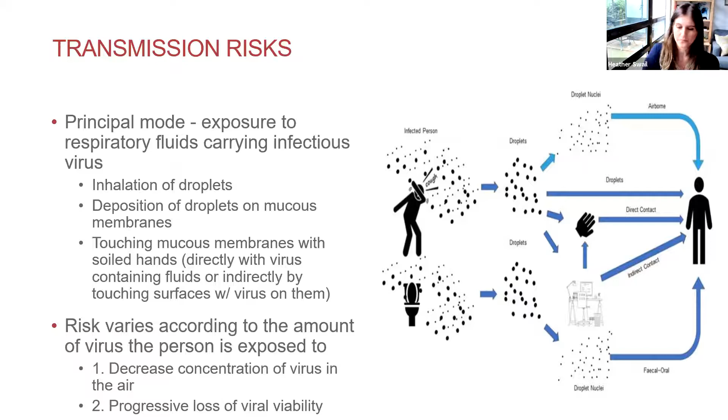So one of the things we're going to touch on is the requirements in BC. If you're not from BC, do not worry, the solutions we're going to talk about really apply everywhere, but I'm just going to touch on some of the WorkSafe BC specific legislation that they are requiring. The first one is that all employers require a COVID-19 safety plan. I hope all of your workplaces have this in place already. If they do not, the WorkSafe BC website has so many good free resources on how to develop this yourself.

One of the things that has been talked about over COVID is a lot of buzzwords: unprecedented times, uncharted territory, evolving science, and they're right. This is a global pandemic. We have not lived through something this severe in a very long time, and the science has been changing throughout COVID.

When COVID first started, I was in the office, it was very low occupancy, but we weren't required to wear masks. Now we have to wear masks in our office in addition to the physical distancing. So things have really changed over the course of a year. And because of that, WorkSafe BC makes sure that you are monitoring your plan and updating it with these changes as well. So the main component of a safety plan is to assess the risks.

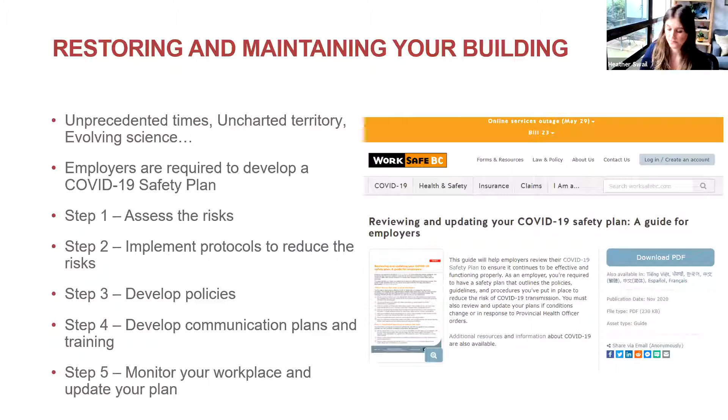So now we'll get into just a touch point on underoccupied versus unoccupied. I think a lot of buildings at the beginning of the pandemic were totally empty. And as we've progressed through this, we've kind of moved to more of a low occupancy, I would say. I have a couple poll questions. Rui, if you wouldn't mind just bringing up the first one. I'd love to just take the temperature of the audience and see what your workplaces are currently at right now.

Okay, so the first question we're going to be asking is, what is the current occupancy of your building? Is it unoccupied, no one's in it? Is it underoccupied, where maybe there's just a lot less people in the office, low occupancy? Or have you resumed to the design capacity? Is everyone back, but maybe it's under a different protocol like spread out or something? Or is it unknown? Maybe you haven't been back to the office in a year and you have no idea how it's functioning. If you can please vote, I'd love to know what you guys are all working in right now.

So it looks like 90% of you are in under-occupied buildings, and the last 10% are at designed capacity. I think that's really encouraging that people are moving back to their normal work life, but I'm also encouraged that it's sort of a cautious return as well.

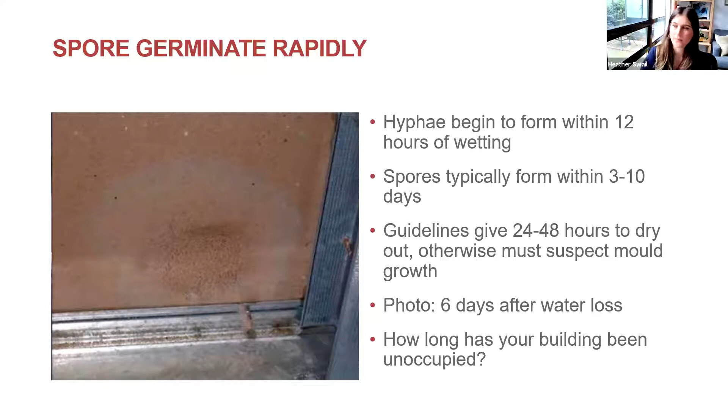So we'll just chat about some common sources of mold. The first two, roof leaks and plumbing leaks, these are extremely common. This happens whenever there's a failure with the roofing or the plumbing system. And the thing to take away here is that large issues are extremely obvious. If you are dripping water from the ceiling, there's an issue. But if it's a slow leak that's going on behind a wall cavity or a ceiling cavity, you might not know there's a big issue and it could be hidden.

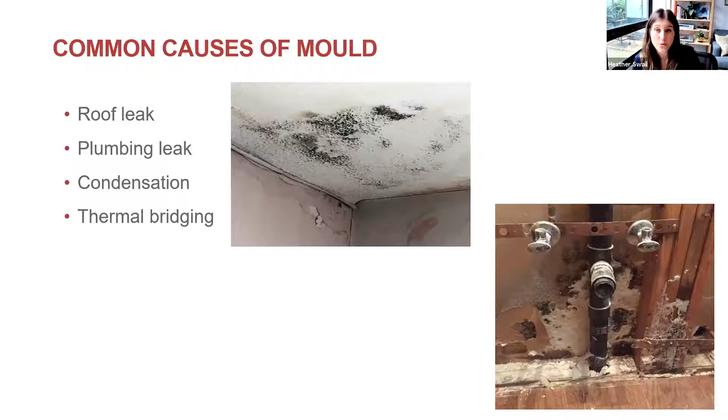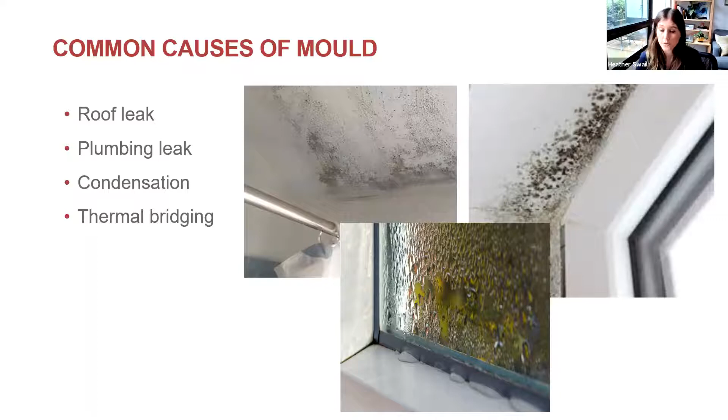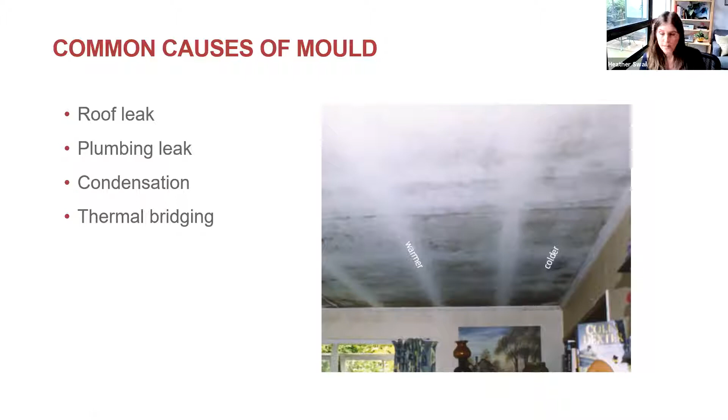And the thing is that even though you can't see it, if hidden spores are being amplified, they can still negatively impact the air quality. And mold is a health hazard. It does affect everyone differently. Very minor reactions can be something on a minor allergic spectrum, like irritation of the throat, sneezing, but things can escalate as well. It can cause multi-system inflammatory effects, neurological problems, or even death if it was in certain species

of very high levels. In 2003, there were 10,000 mold-related lawsuits in the United States, and some of them have some celebrities, and I will tell you about them because I'm addicted to the tabloids. So in that year, in 2003, Ed McMahon, the host of The Tonight Show, settled a lawsuit for $7.2 million because his house made him and his wife very ill because of toxic mold, and it killed their dog.

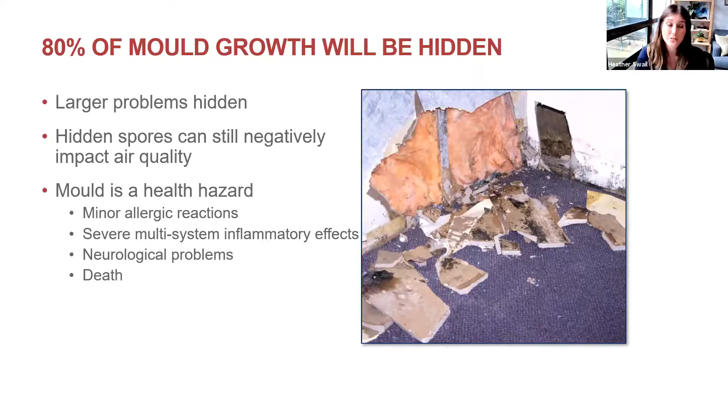So steps to minimize mold after a prolonged shutdown or a prolonged period of reduced occupancy. The first thing to talk about is managing your relative humidity. Mold can grow on almost anything. It just needs a nutrient source, it needs moisture, and it needs the proper conditions. So keeping your relative humidity between 40 to 60% is ideal during COVID, also from an air quality perspective, which we'll talk about a little bit more later.

The next thing is doing your due diligence, inspecting your building for any moisture or water damage. Smell musty odors as well. If you are smelling something that is, I like to call it kind of like a musty, possibly grandma smell. It definitely smells like my grandma's basement because that is very moldy. That's exactly what I think of.

And if you do find any issues, address the source of the water first and then follow it with your remedial mold actions. And then also HVAC operation. Make sure you have a maintenance program and you're inspecting it regularly. We'll talk about that more in the upcoming slides as well.

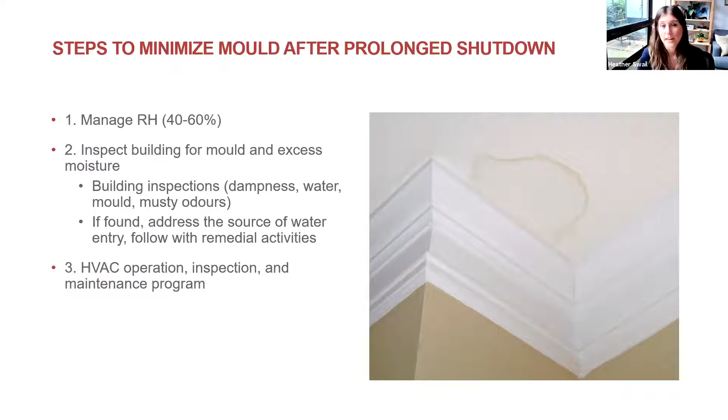Okay, we're going to move on to Legionella now, which is the second environmental hazard identified by the CDC for returning to buildings. Legionellosis are the diseases caused by Legionella bacteria, and there's two main ones. The first one is Legionnaires' disease, and the second is Pontiac fever. Legionnaires' disease is the more serious of the diseases. It causes potentially deadly lung infections. Pontiac fever is the more mild infection with more flu-like symptoms.

The way to get these diseases is inhaling the Legionella bacteria. So basically the bacteria is aerosolized, and if you inhale it, that's how you can get Legionnaires' disease or Pontiac fever. And the main reason people get sick is because the water system is not properly maintained in the building. We'll talk about those in the next couple of slides as well. One way this is not like COVID is it's not contagious. COVID, we can pass from person to person. Legionnaires' disease sticks with the host.

You can't spread it. There's about 6,000 cases a year that the US is reporting, but we do think that number is probably on the low side because some people that have the symptoms of Pontiac fever probably think it's just a flu and it goes away on its own without treatment. But it is very treatable; if it's caught early with just standard antibiotics, most cases do clear up. However, the fatality rate is about 10 to 15%.

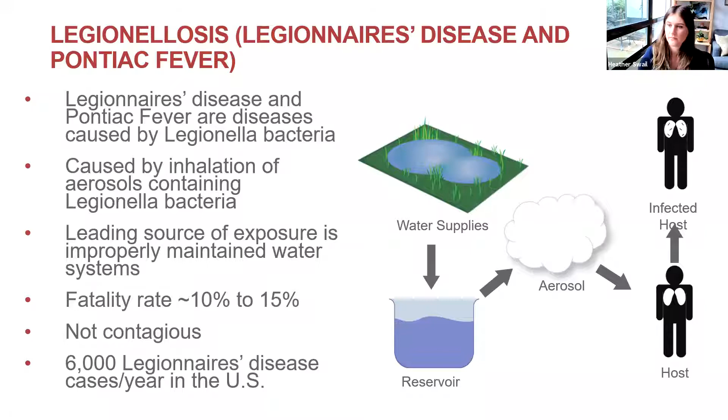So what affects Legionella? There are two really big things to chat about, and one is temperature. Temperature is a huge one. Legionella bacteria is in all water. It's in all natural streams and lakes. It's when it's in a man-made system where that bacteria accumulates to really high levels that it's the problem. A temperature in the Legionella growth range of 20 to 49 degrees Celsius is ideal growth for that bacteria. Anything above 49, the bacteria will start to die off, with rapid death above 70 degrees Celsius. So really the hotter the better for killing Legionella bacteria.

Another thing to talk about is biofilm. Biofilm is that sticky, slimy, pond scum-like stuff. It's the primary contributor to Legionella outbreaks. Basically, this slime protects the bacteria, so whenever it's disturbed, it releases a huge quantity of Legionella bacteria, which is associated with a lot of the building outbreaks that we see. Particularly, we see this issue on corroded surfaces, so your domestic hot and cold water systems.

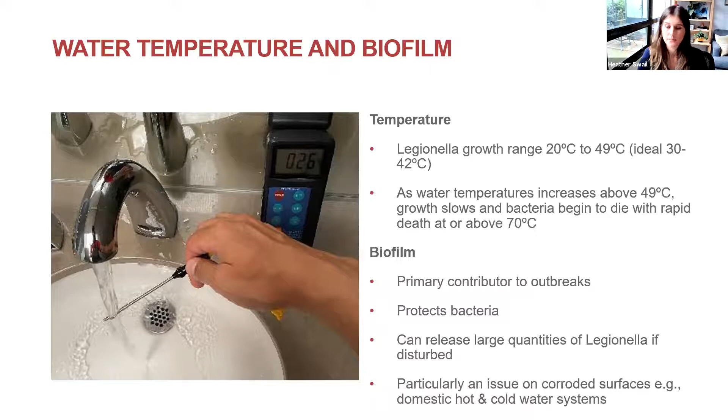So the main concern specifically with COVID is dead legs. So dead legs are the section between, in this case, the sink and the circulation riser where the water is sitting stagnant. So that horizontal piece there. It's a big issue in COVID because we're not using these sinks like we used to be, in this case, a sink. If we had a fully occupied building, maybe a sink is used 200 times a day, depending on how big your office is.

But if the occupancy is not there or has been reduced, that water is sitting stagnant in that dead leg. And it's a beautiful breeding ground for Legionella bacteria. So turning on that, if the building has not flushed water regularly, this is a big concern.

The second concern with this from the CDC is leaching of metals as well. So while the dead legs foster bacteria growth, that water also sits in the pipe that can leach chemicals and metals that it's sitting in. So if you have an older building with lead solder, that lead could leach into the water as well. So another thing to think about, and also why flushing the water in your building is super important.

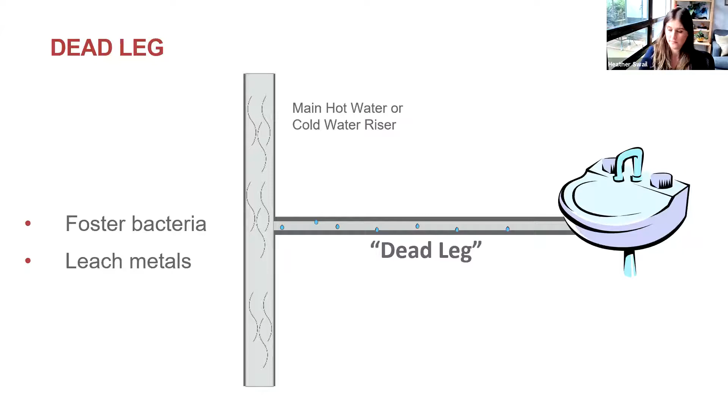So the recent questions we're getting with Legionella is, do you have it in your building? My building has been vacant or very low occupancy for so long. What do I do now that people are coming back? Do I have to flush the building? Do I have to test it? What are my resources associated with this?

The simple answer is that essentially almost all buildings will have Legionella. If your building has been vacant or low occupancy and there has been regular flushing, you're probably going to be in okay shape. If the flushing has not happened regularly, our recommendation would be to start flushing the building and then test your building for Legionella to make sure that you're managing the problem. We don't recommend testing if you haven't flushed yet. There's really no need to test a worst case scenario. We want to test after the building's been flushed to make sure the program you're using is working for your building. And we will talk about testing coming up.

The good thing about Legionella is that it is such a well-documented problem. There are tons of resources of how to manage this for free. There are ASHRAE standards, AIHA standards, the Government of Canada standards that will help you with flushing and how to maintain your water in the building.

So a couple of the things when you're considering testing before people come back. The first one is that there are specific sampling procedures. For one thing, the supplies need to be in specific sterile bottles of a certain size, depending on what you're sampling. It's a 100 milliliter sample for a cooling tower and a 500 milliliter sample for usually any other source. It has to be packed in an insulated cooler, and the timeline is also very important.

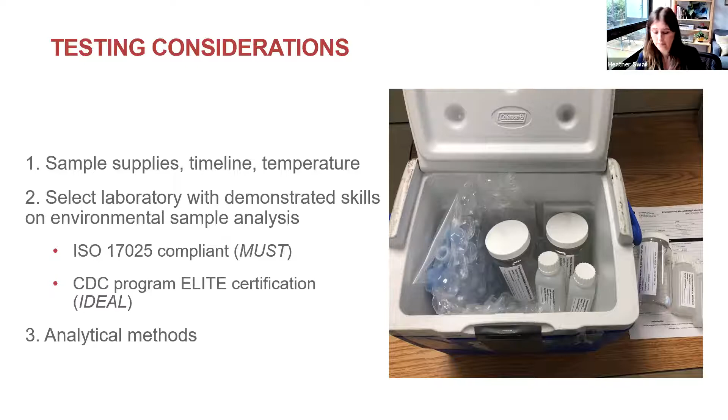So for the Legionella analytical methods, there's 3 main methods. There's culturing, qPCR, and then DIY test kits.

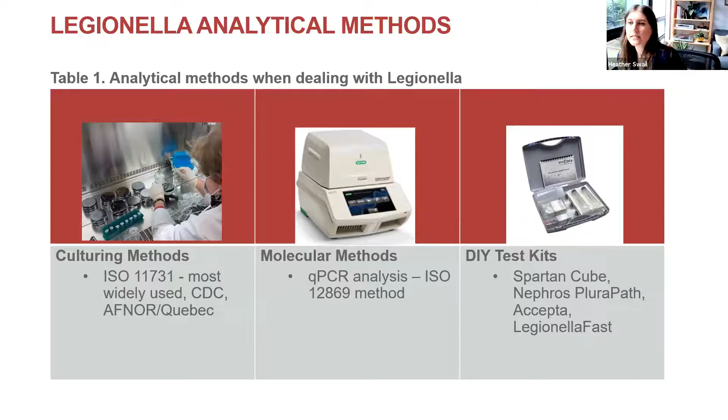Definitely culturing is the gold standard. What it does is it measures the viable colonies of Legionella. So you can see the Petri dish on the side. That's the Legionella growing, actually. The one downfall with this is that it does take 7 to 10 days to get the results because they are culturing on the Petri dish plates, but it will tell you the viable Legionella, which is so important.

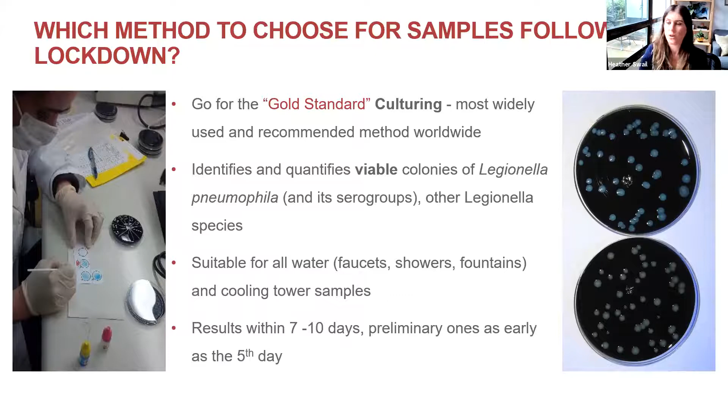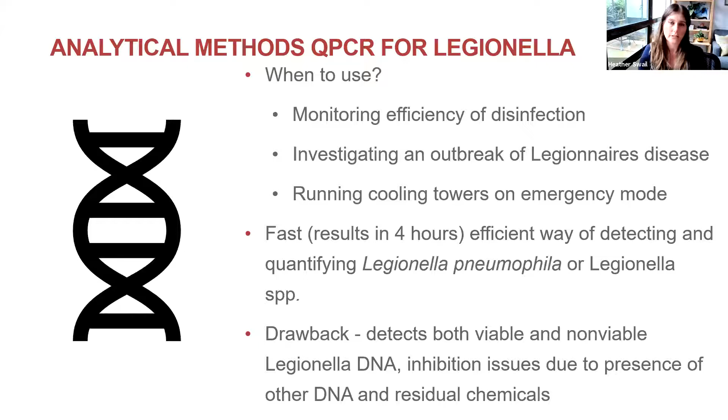The QPCR method is beneficial because you get results very quickly, usually within 4 hours of receipt at the lab. But the downfall of it is that it detects both viable and non-viable Legionella. So what our recommendation would be is if you have not tested your system yet, would be to do the culturing method. And then if you did identify a problem, use the QPCR afterwards to make sure your flushing program, your hygiene program is working effectively.

So steps to minimize Legionella before coming back into your building: develop a water management plan if you don't have one already. Those resources I showed on the previous slides have a lot of canned programs that you can implement at your building. Make sure your system is maintained properly, especially the temperature side of things, and flush the system. Flush it and have a flushing implementation program.

Also, clean all your decorative features like water fountains, any fountains, hot tubs, spas. A lot of buildings have gyms in them now, stuff like that. So a shower might not be that odd in an office anymore. Cooling towers are a big one to make sure they're clean and well maintained. And there are water sources that we forget about a lot too. If you have sprinklers, eye wash stations, safety showers, those all use water and need to be clean and well maintained as well.

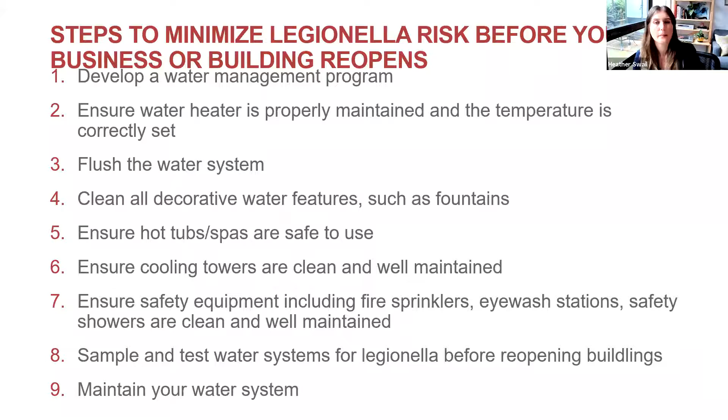And then sampling and testing your buildings for Legionella is recommended before reopening your buildings, and then maintaining your water system moving forward. So now we'll get into some of the building systems about safe and unsafe startup. So the biggest question we've had around COVID has been with HVAC and what to do with your HVAC system. How should we change the building operation? What should we be doing?

ASHRAE is the leading body that gives us recommendations related to HVAC, and they have included recommendations for COVID. ASHRAE stands for the American Society of Heating, Refrigerating, and Air Conditioning Engineers. They have released a lot of documents. Some are paid, some are not, but on their website they've listed their top COVID recommendations. And those are for reducing the airborne infectious aerosol exposure. So those really fine particles we were talking about earlier.

So their core recommendations include ventilation, filtration, and air cleaning. More fresh air, the better, and trying to achieve a MERV 13 or better for your filters. We'll talk about all of these in more detail in the upcoming slides. Air distribution is a big one as well. We want to avoid drafts, which we'll chat about. And your HVAC system operation, maintaining your temperature and relative humidity set points, trying to flush between occupied periods, and making sure 3 air changes or equivalent of clean air supply is kind of the goal according to ASHRAE. And also verify system commissioning, making sure your HVAC is functioning as designed.

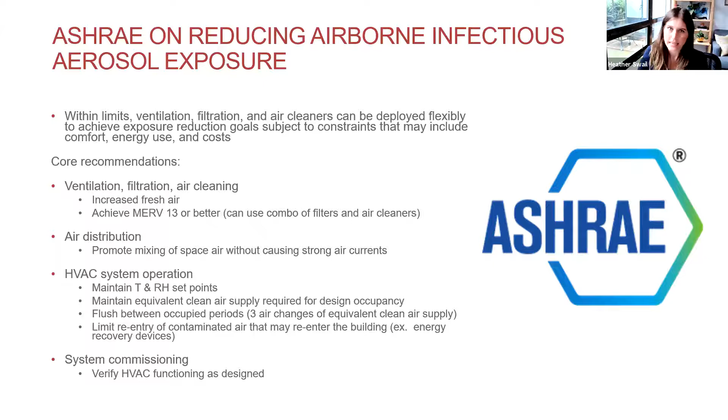So this drawing really shows why poor ventilation leads to high infection rates. On the left, you see the individual with the heavy droplets. They're just falling on the ground in blue due to gravity. And there's a few red aerosol particles in the air. So if you're getting a lot of supply air and exhaust, you're diluting it with the supply and removing it with the exhaust. That's really the goal.

On the right-hand side shows what happens when there's no ventilation. Those aerosol particles just build up over time. The longer an infected individual is in the space, the more that is going to accumulate in the room. That's why ventilation is so important. So really the takeaway from this cartoon is to provide as much outdoor air as you can. You can demonstrate you're doing a good job of that by air monitoring, which we'll talk about at the end of this section.

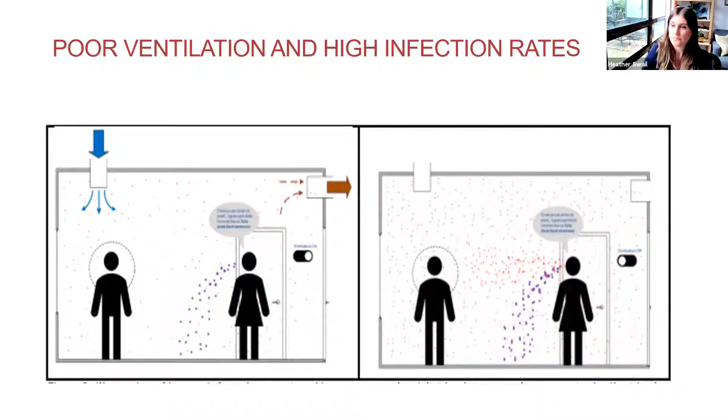So filters, ASHRAE recommends to upgrade to MERV 13 or better. If that's not possible, upgrade to the highest MERV rating that your system can handle. And one thing these photos are illustrating is filter bypass. Not just the MERV rating of your filters, but making sure they're seated properly, they're installed properly is a very big deal with filtering out these aerosol particles.

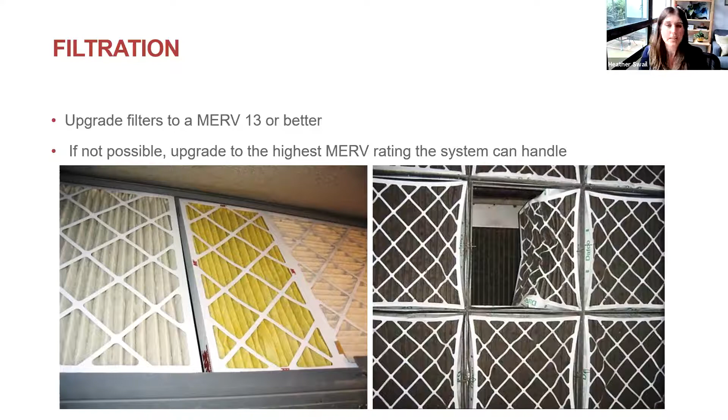On the photo on the left, you can see there's sort of a space between the white filter and the yellow filter. The air that it's supposed to be filtering is moving right in between that crack, so it's not getting filtered. The photo on the right is sort of a more extreme example where a filter has been damaged, but the air is totally bypassing it then. So your MERV 13 filters or better aren't working very well if you're not installing them properly.

So this is a very interesting study about why drafts are so important with COVID aerosols. This is a restaurant. On the upper right-hand side, they have a wall-mounted air conditioning system. The person seated in A1 was the infected individual. And all of the other people with the red circles at table A and table B became infected with COVID

because of this outbreak. So the air conditioner took those aerosol particles and carried them much further than the 2-meter distance. This really was a good study to show how drafts impact the carry of those aerosol particles. And no one in tables F, E, or D got COVID because they weren't in that airstream. Very interesting.

So one thing to touch on is how would this apply in your building, in your office, in your school? Well, one of them that I look at a lot is you see these air conditioning units in a lot of boardrooms, the wall-mounted ones. Also, a lot of desk fans. People put fans at their desk or personal fans somewhere in their office space to help control temperature, but really not advisable during COVID because it can carry those aerosol particles.

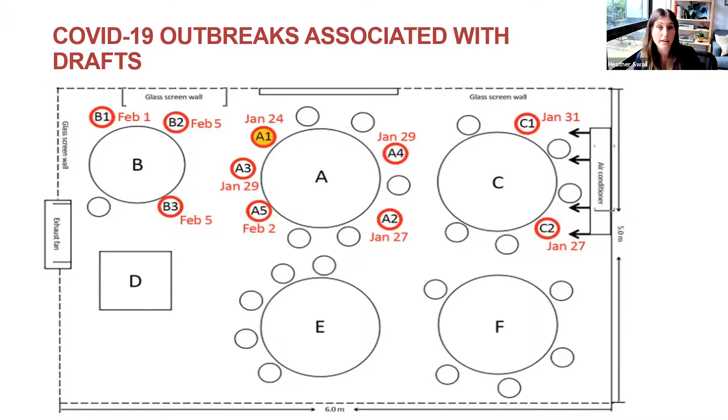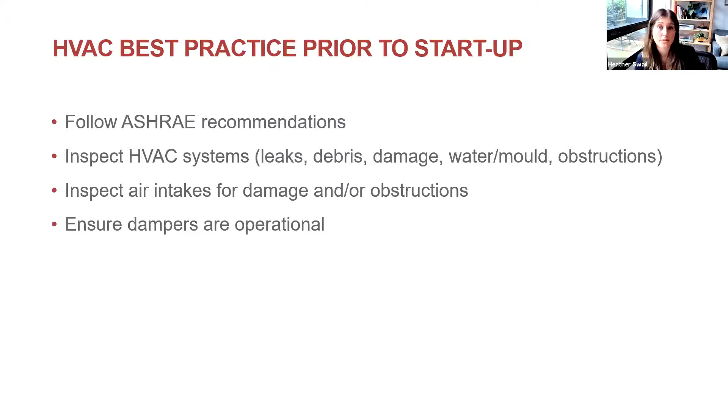So the HVAC best practices for startup: follow the ASHRAE recommendations we talked about. Do your due diligence with inspection, see if there's any leaks, debris, damage, if you see any water or mold, and also obstructions. If there's anything blocking your supply diffusers, your return air exchanges, if the intakes have been damaged or if they're blocked by anything, and making sure your dampers are still operational as well.

So one of the things a lot of our clients are moving to is re-occupancy indoor air quality monitoring. When we talked about that outrage piece at the beginning of the presentation, indoor air quality monitoring can reassure your occupants that you are managing the air quality. Before COVID, air quality was the #1 concern for tenants. It was the #1 environmental factor that they saw value in. And I think that's even more important now in a COVID world.

So we look at a couple of different things here, and there's a couple of ways to test as well, which I'll chat about. But the benchmarks we look at are measuring carbon dioxide, particulate matter, and relative humidity. So starting with carbon dioxide, we measure carbon dioxide as basically a surrogate for ventilation. We breathe out carbon dioxide when we exhale. So the more occupants, the higher the carbon dioxide will be. But that's diluted when we bring fresh air into the room. So if we have a good ventilation rate, we should have pretty low carbon dioxide numbers.

Our general comfort recommendation that we look at as a goal is about 1,200 parts per million. But during COVID, really 800 would be ideal. There was a study done in the Healthy Buildings program at Harvard where about 800 parts per million was associated with 4 to 5 air changes per hour, which would be considered good and ideal during COVID.

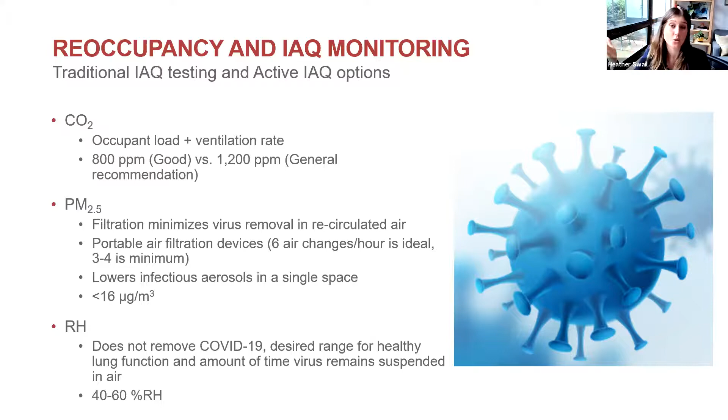A lot of tenants might be questioning right now if they need the space, the amount of space they're in now. And this is showing that you're doing your environmental due diligence and also proving that you are sort of in an elite echelon of building owners or managers or maintenance, that you're taking this seriously. And this is a great feature for your building to have.

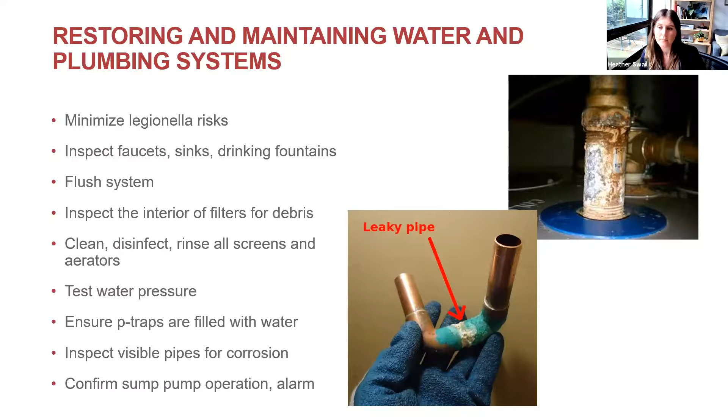So we did touch on Legionella, but just to look at some of the other water and plumbing systems: minimize the Legionella risks that we talked about earlier, flush your system, inspect your water systems, do your due diligence. But a couple of other things that are non-COVID related, but just return-to-your-building related, is cleaning and disinfecting your screens and aerators, test your water pressure, make sure your P-traps are filled with water, inspect any visible pipes you can see for corrosion. Certainly leaky pipes are the cause of a lot of moisture, water damage, potentially mold issues. And also don't forget about your sump pump and making sure that alarm is still working.

Fire and life safety systems, absolutely making sure everything is in working order before coming back. Make sure your fire alarm is working, all of your life safety systems, including your fire suppression system. So any water-based system, inspect the valves, the gauges, the sprinkler system and heads, your fire department connection, and make sure they can get in and connect to your building, and your emergency water shutdown as well. If you have a specialized suppression system, make sure you're following the manufacturer recommendations still.

And one common thing that I've seen people forget coming back into their buildings is inspecting extinguishers and their hose cabinets. Make sure that those are still maintained and inspected on their regular basis, and that there's nothing missing from your hose cabinet. Like there's usually a glass breaker there. Make sure that's still present.

And access and egress, this is another thing people are forgetting about. I found a lot of offices have become sort of storage rooms while a lot of people are working at home. Make sure that all of your pathways and doorways are unobstructed. If you have a pile of Amazon boxes to the ceiling, it's time to recycle those so people can get in and out of your building. Make sure the fire doors are closed and that the latch is operational, that they're working, that the hydrants aren't blocked, that the fire department lanes are unblocked and accessible, and making sure all of your exit lights are illuminated as well, making sure none of your lights have burnt out or anything like that.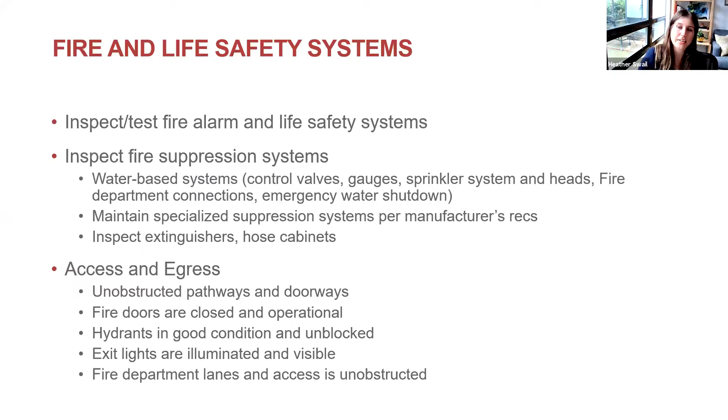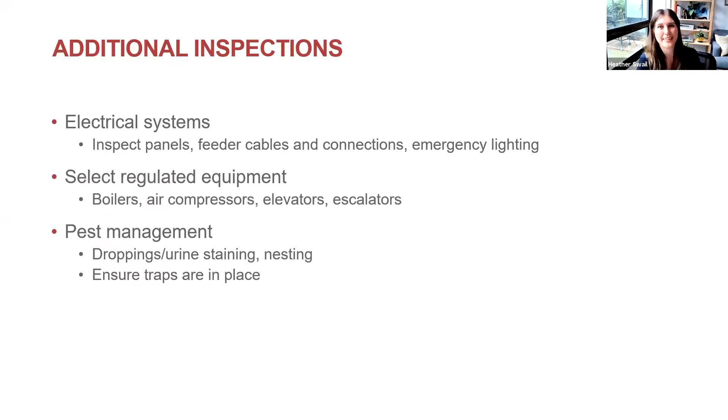And pest management, lastly, because we haven't been in our buildings regularly, we've had a ton of requests for pest management programs and pest management remediation. They've made really nice homes in our buildings with lots of droppings, urine stains, nesting. Make sure you look for all of that during your inspection. Make sure your traps are still in place or replace them if they're full. That's another big one to look for. Your employees might want to go back home if they come into their office and they see a rat scurrying across the floor. So a good thing to look for.

And building maintenance. Let's do the last poll question now if we can, Rui. I'm very interested to see how you guys think about this one. Post-pandemic, where is your preferred work location? Have you settled in at home and you never want to come back to the office? Or are you missing the people aspect of things? You can't wait to get back to the office. Or maybe it's other and you would rather work in an alternate location. I'm really curious about what you guys have thought about this. We're polling our own staff to see their thoughts, and I can't wait to see what you guys think as well.

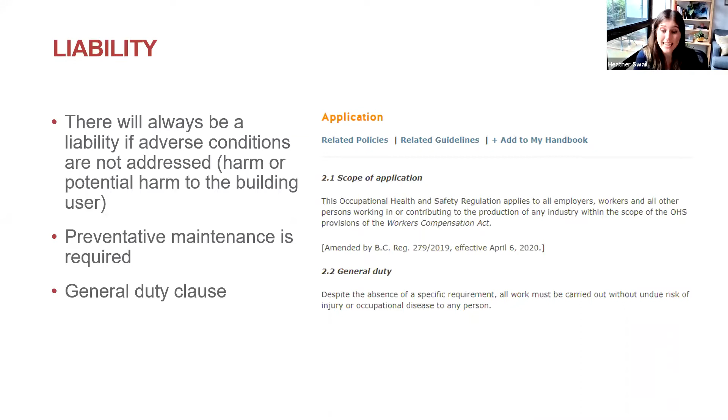Every province has a general duty clause. For BC, the general duty clause says, despite the absence of a specific requirement, all work must be carried out without undue risk of injury or occupational disease to any person. Everyone has a right to work in a safe environment, is what this says. So not maintaining your water systems and causing a Legionella outbreak, not addressing a mold concern and someone getting sick, you could be liable for this. So make sure you do maintain your buildings appropriately.